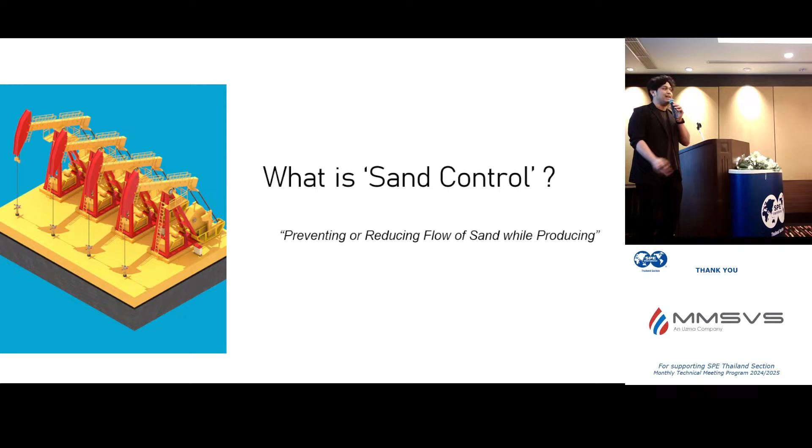So a little bit of introduction. What is sand control? Well, normally, if you produce something from downhole, whether gas or oil or even water, you have to expect something else from the reservoir, which is sand.

Sand comes in a lot of forms, but mainly we don't want them. So sand control is preventing or reducing the flow of sand while you're producing. That's just the definition of it.

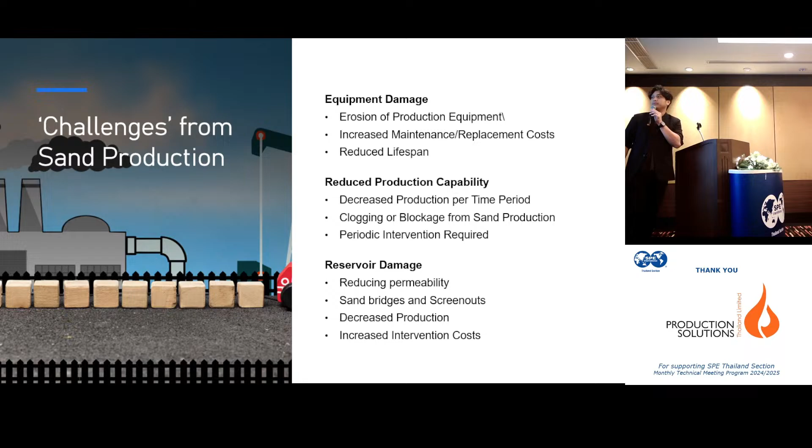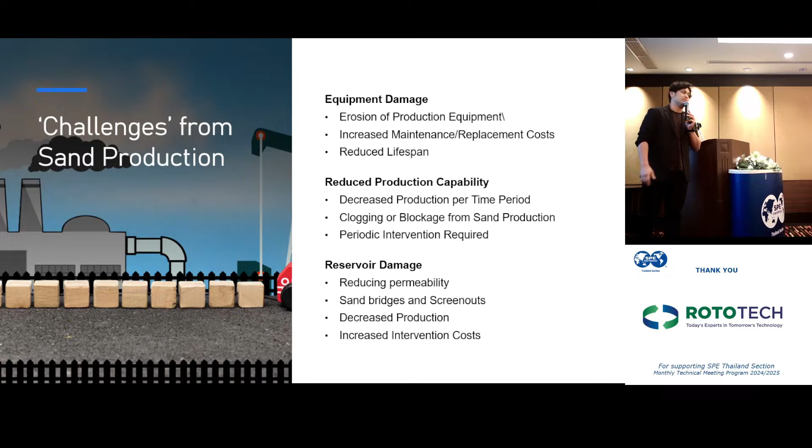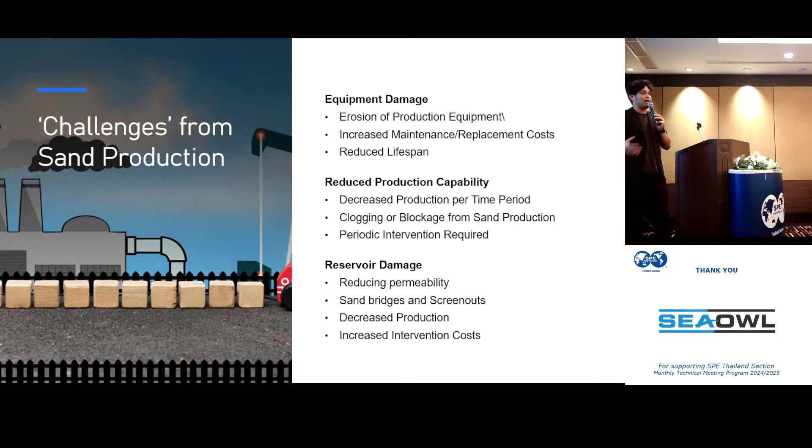So what happens when you get sand production while you're producing or trying to generate oil and gas for your revenue? Well, first of all, you get equipment damage. We know sand is a solid particle that does damage if you have enough velocity. Not only that, it also reduces the lifespan of your equipment after you get some damages.

The consequential cause and also some of the things that might happen along the way is you get reduced production, and that can be prevented from either an early stage or you try to control it at a later stage. Last but not least, reservoir damage, of course.

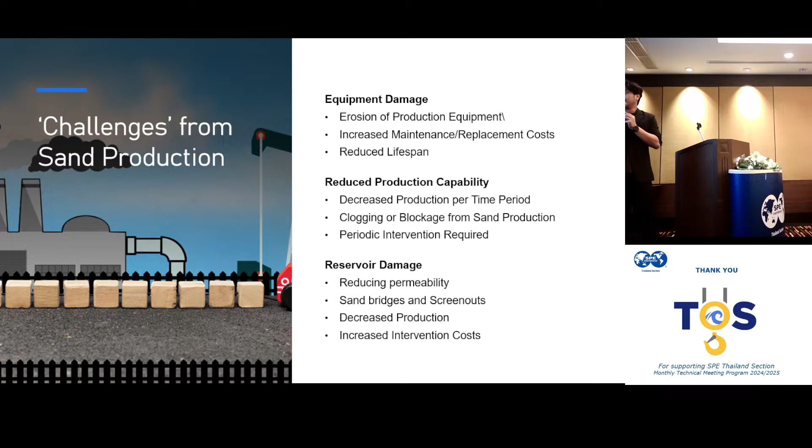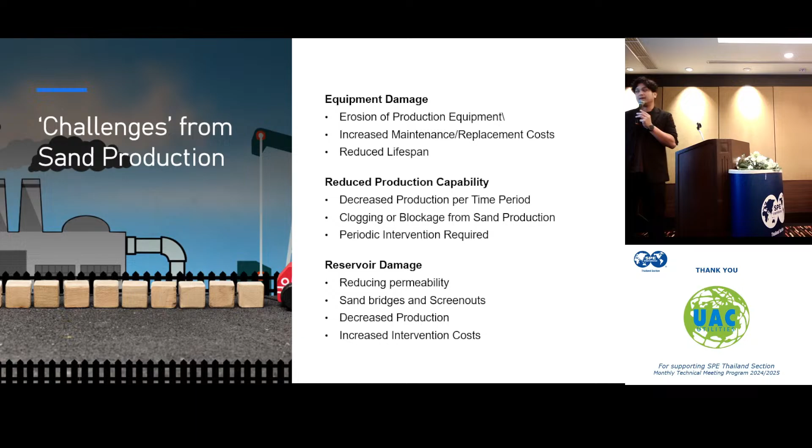The more you produce sand from your reservoir, something comes out, meaning you leave something behind. Mainly sand comes from the reservoir, so if you're losing sand, you're also losing some integrity of your own reservoir.

Okay, so there are many methods, and I'm not allowed to mention the names of the methods from different companies. So I did consolidate most of the methods into 4 major categories.

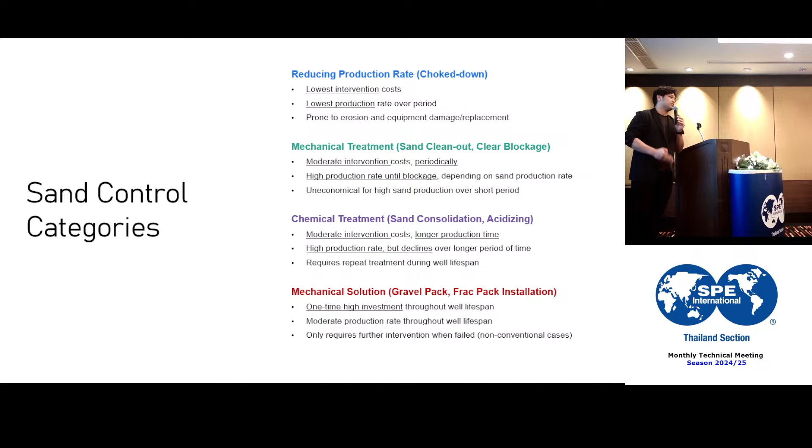First of all, is doing nothing, which is just reducing the production rate. If you do have sand, you don't want to produce it so fast that you can end up damaging equipment, either surface or downhole, doesn't matter between upstream or downstream.

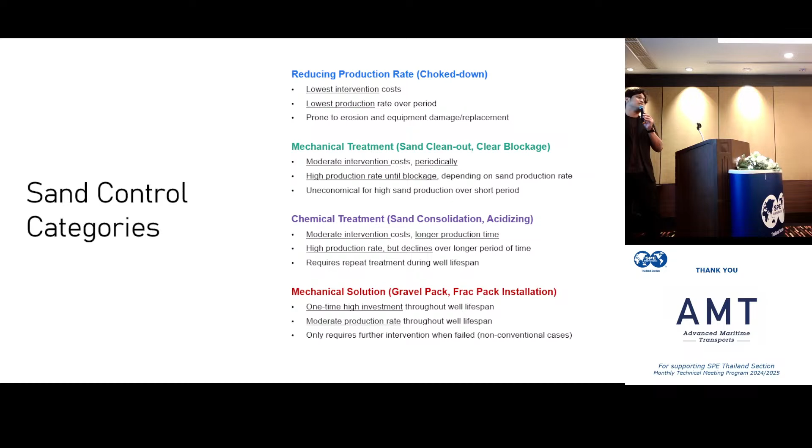Second method relies on some mechanical treatments. By mechanical treatments, we're talking about installation or partial installation of something - either you leave something downhole or you substitute downhole volume with something else.

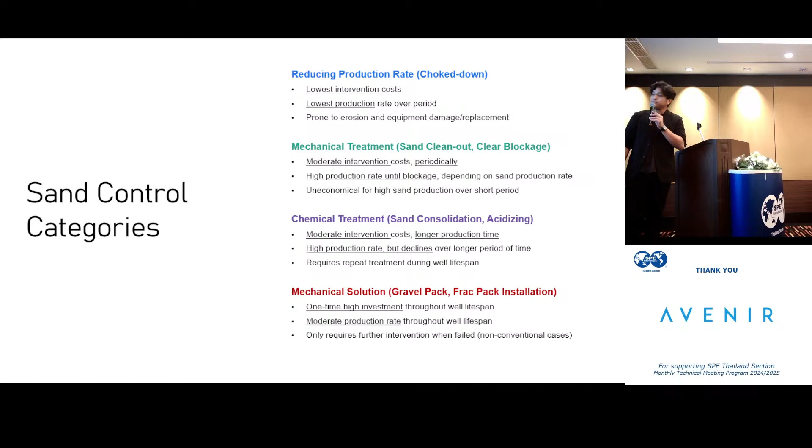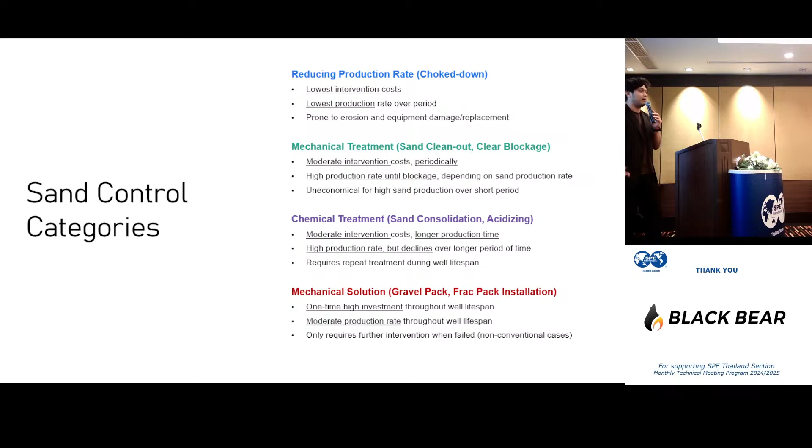Chemical treatment is based on using solutions where you get a chemical mixture, trying to remediate either the formation or the sand downhole before it comes up to surface.

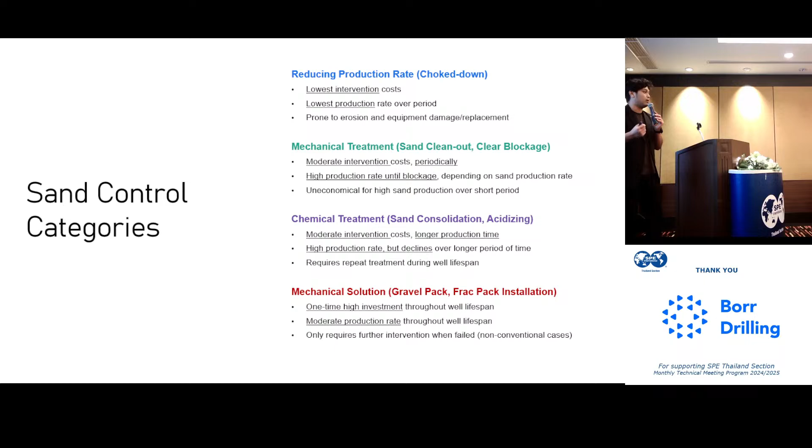And mechanical solution, which is a solution because it is designed to solve the problem permanently. However, that is only when it's ideal. There are so many cases where mechanical solutions or installation also fails, and that is also part of this presentation where we're going to talk about later on.

So some key points - I know this is quite a lot of text on one slide, but just to point out some of the main categories and the pros and cons. Reducing production does not involve any intervention costs until you do need one.

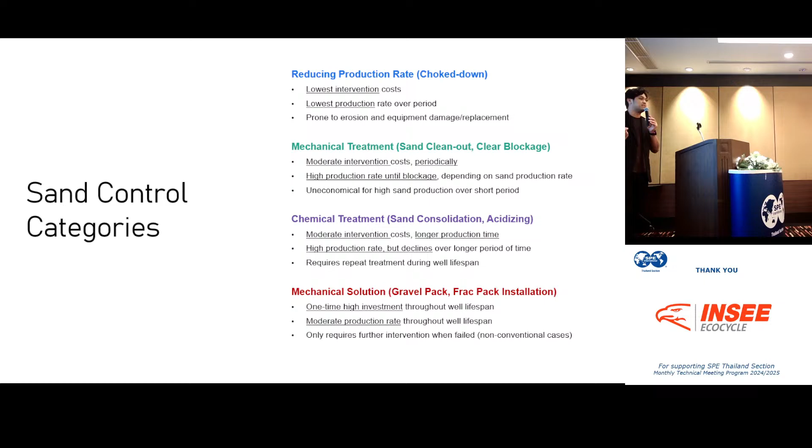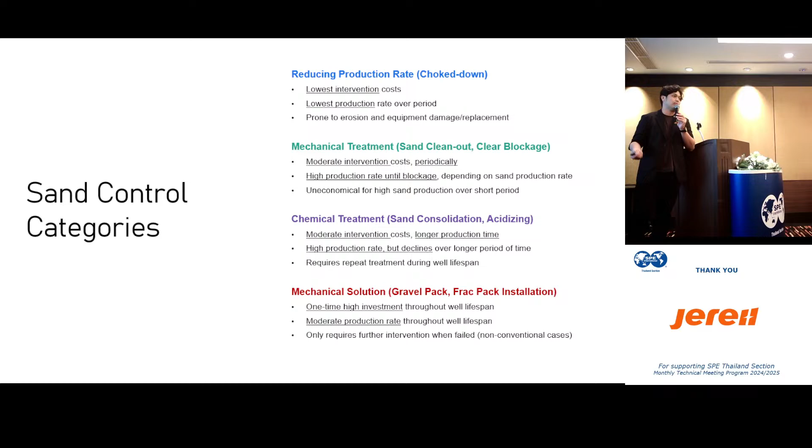So what does that mean? It means that you can produce sand up to a certain rate before it starts damaging your equipment and actually have to replace them. So you do get a low intervention cost because you don't have to do it that often or rapid. Second, you do get some lower production rates because you're trying to control the rate to not produce enough sand to damage something.

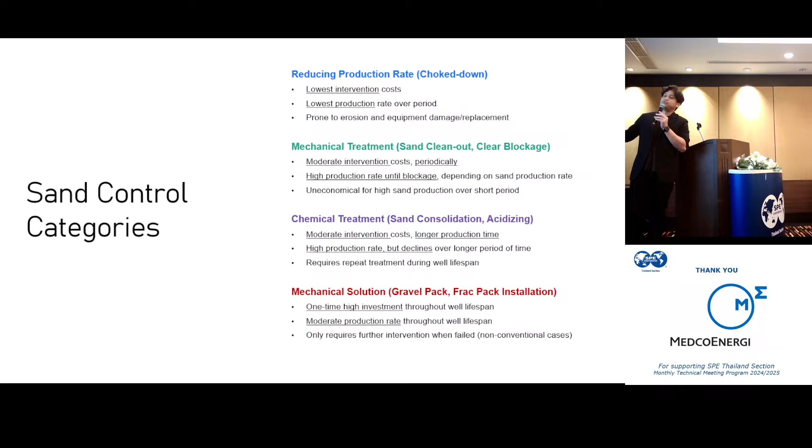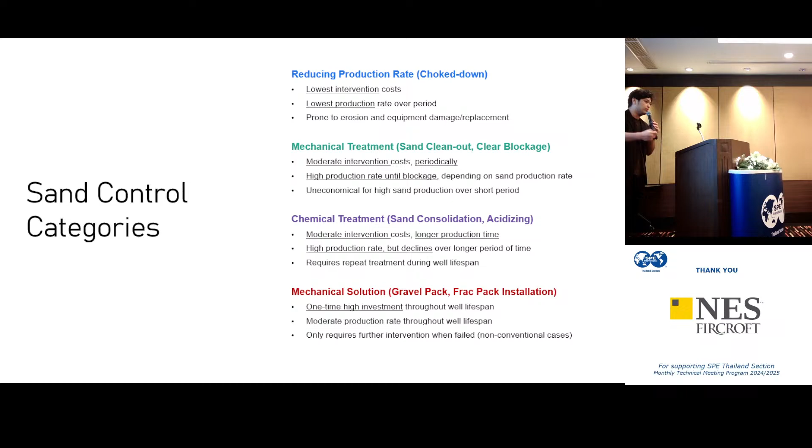Mechanical treatment is what we call just treatment. You go downhole, you have sand downhole, and you want to get the sand out. You either go down with coil or slick line, trying to bail it out to resume production. That's what mechanical treatment is limited to. You do get some intervention costs because every time you call out a service company, you have to pay them. So it's periodic, and you do get a high production rate in return. However, the risk is that you end up clogging, bridging, or actually damaging your reservoir at the end.

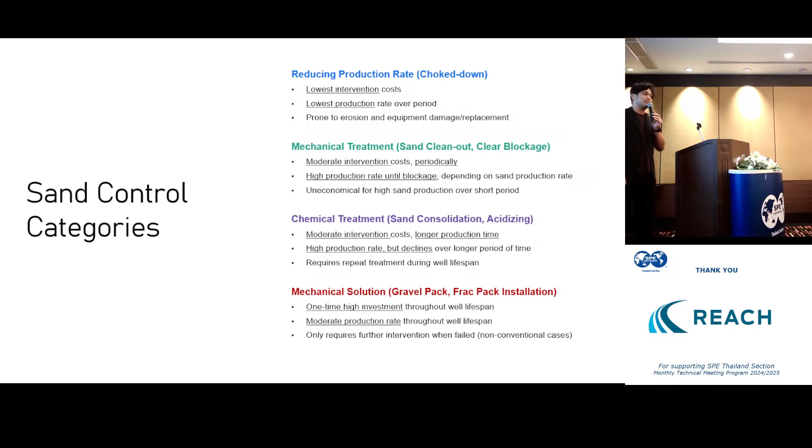Chemical treatment, on the other hand, is not done as often as mechanical treatment. If you do a chemical treatment, you expect it to last for a certain period of time, otherwise you don't consider doing it at all. So there are more costs compared to mechanical treatment, but you don't have to do them as often. That's the difference between the two treatments.

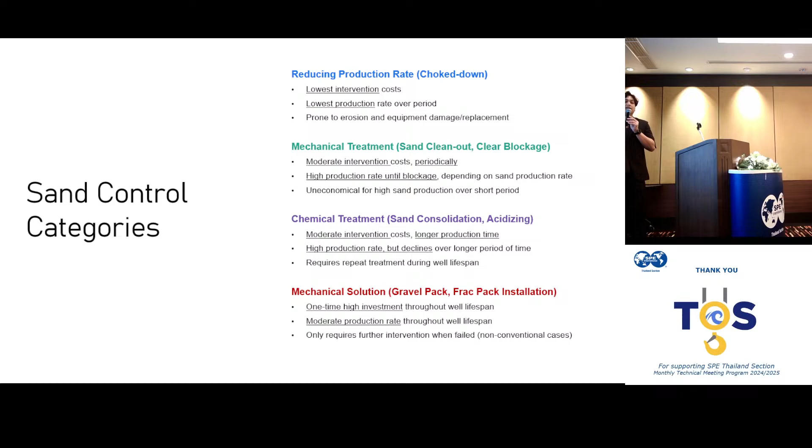And last, the mechanical solution is when you actually go down and install something to stop the sand from coming out of the formation at an early stage, an intermediate stage, or even the latter stage. So these are the four main categories that I can conclude for us in Southeast Asia and what we do.

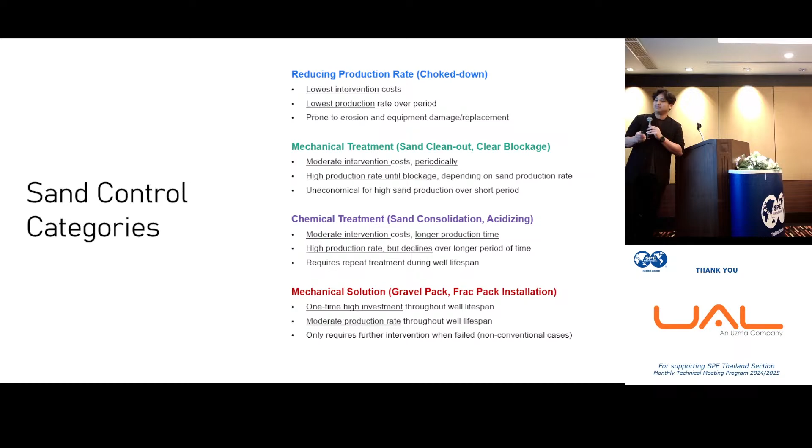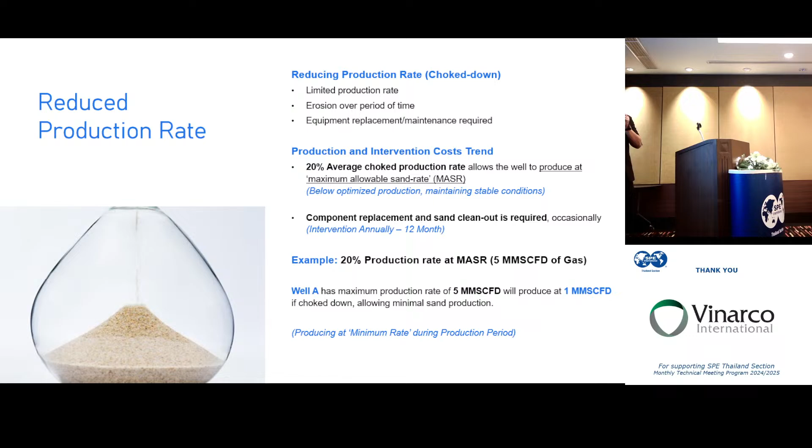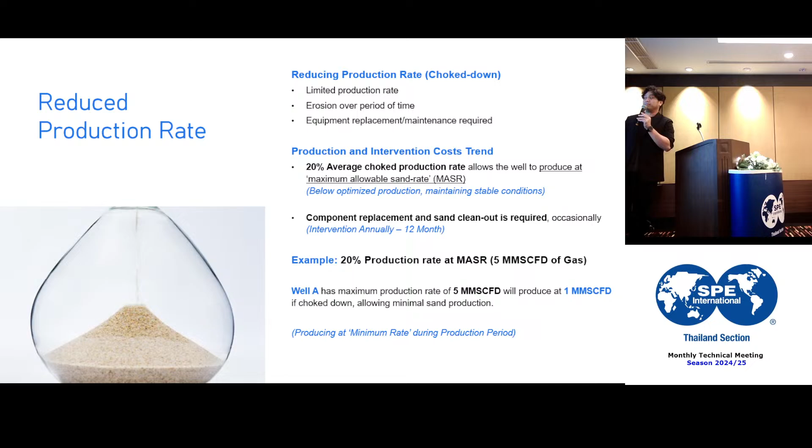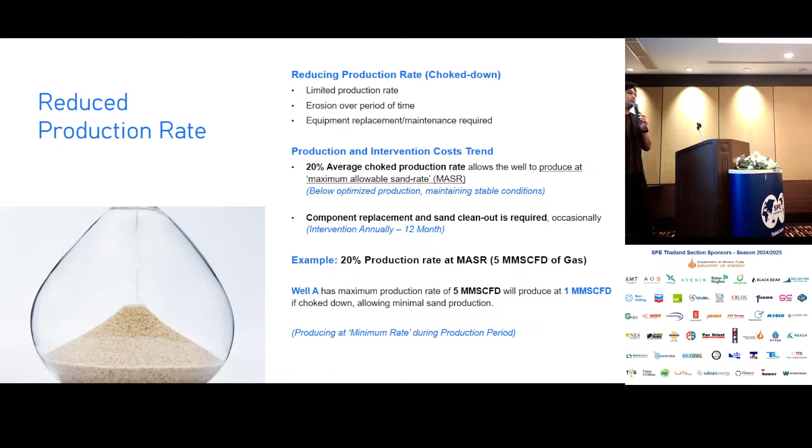So this is a bit more detail on what a reduced production rate is. On average, when we do sample collections from different places in Southeast Asia, we find that with a reduced production rate, you might have to choke down the maximum potential of the well to about 20%. That means when you're producing a gas rate of 5 million scf a day, or an oil rate of 500 barrels of oil per day, you can only expect to produce without the sand coming out at around 1 million scf or 100 barrels of oil per day. So 20% is the rate you can flow without producing the minimum sand, or no sand at all.

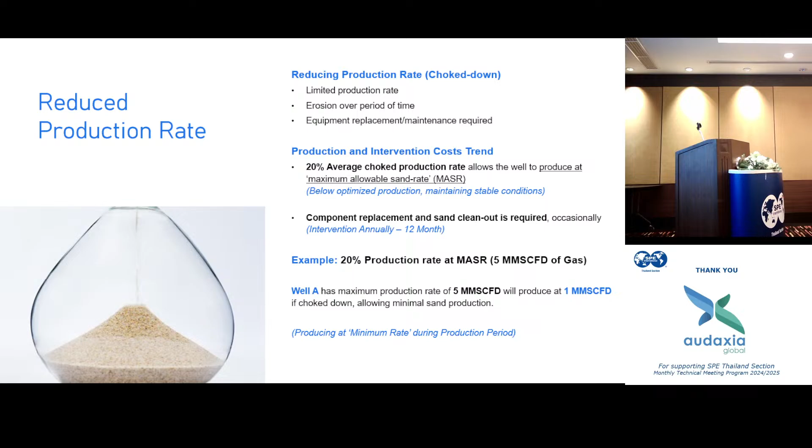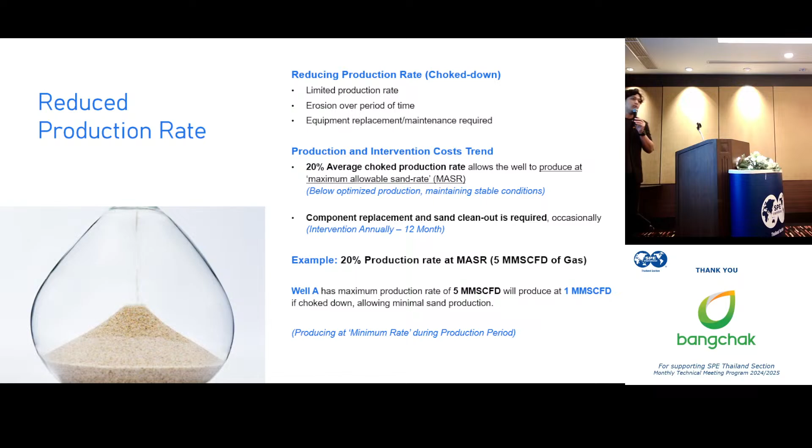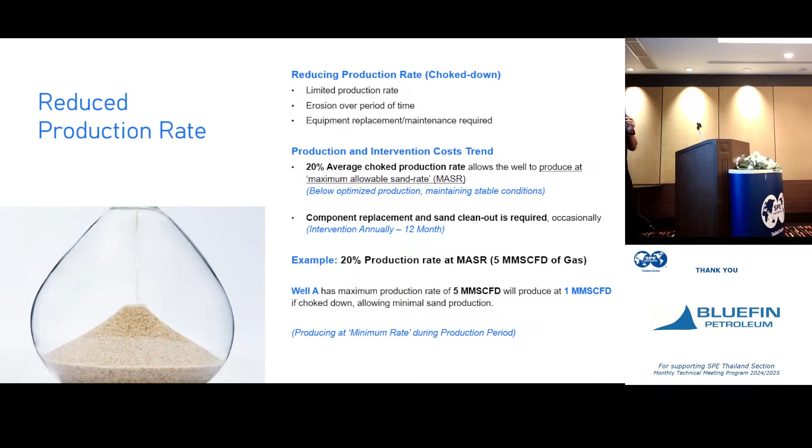That's what we're trying to aim for - not to produce the sand out, but still want the oil to come out. This way you don't get that much downtime, and you might eventually have to clean up the well from time to time. However, if you don't have to, you might still have to deal with equipment replacement or equipment damage later on. So this cost is somewhat not exact, and it doesn't happen every time. Case to case is also different.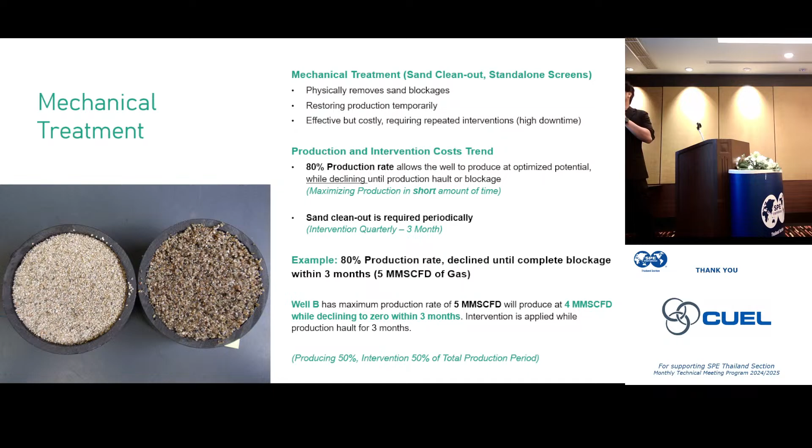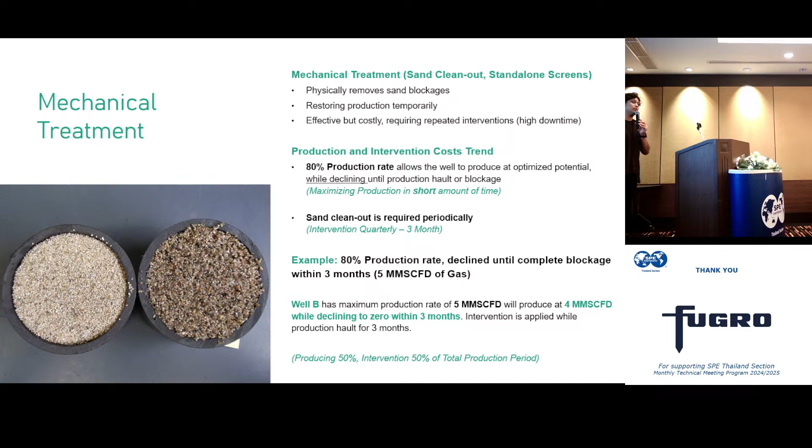Mechanical treatment, on the other hand, you can expect to produce as fast as you can, as much as you can, until you can't. This means that at a rate of 5 million scf, you might be able to produce at 4 million scf, which is around 80%. However, that well will be full of sand until you can't produce anymore, and then your production depletes. Once production depletes, your production is stopped, and you have to recover all the sand out until you can resume production again.

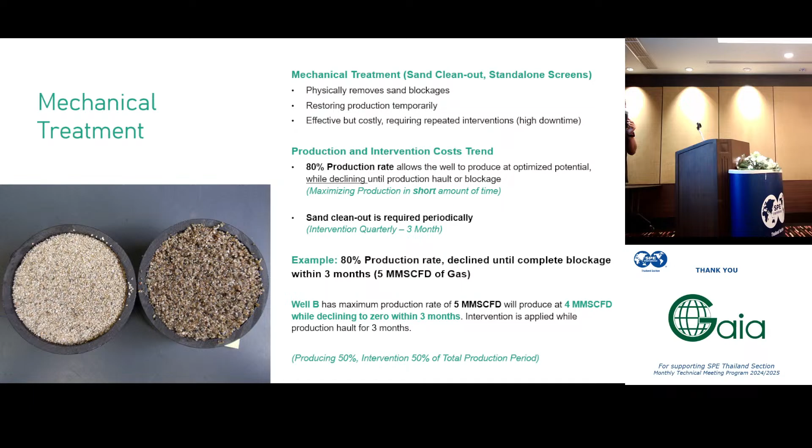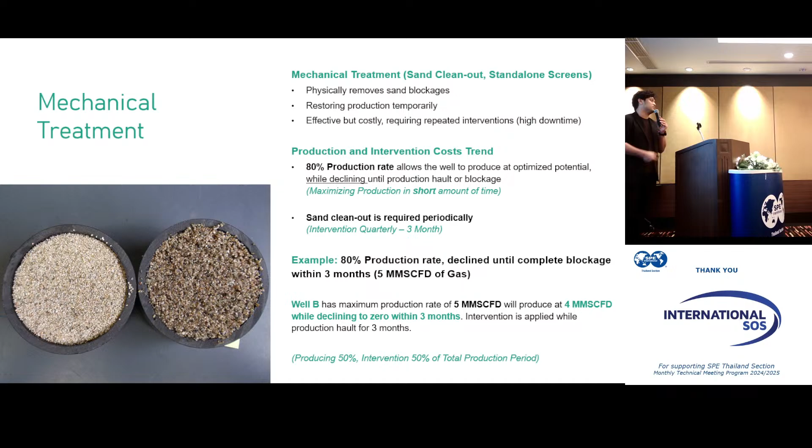So what we've found so far is that 50% of the time when you start producing, it's almost the same amount of downtime that you have to clean it out. So this becomes like a 50-50 split, where you can produce and you can't produce, and you do intervention instead.

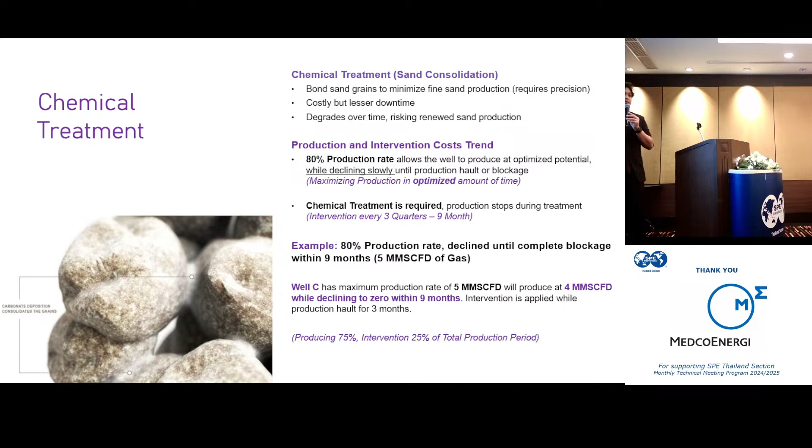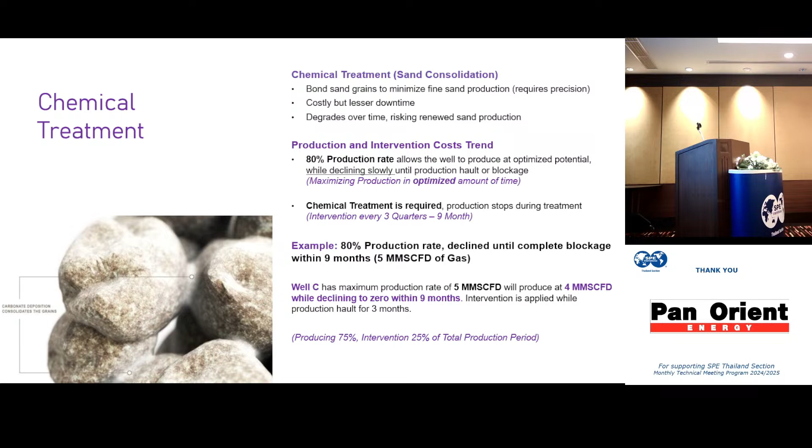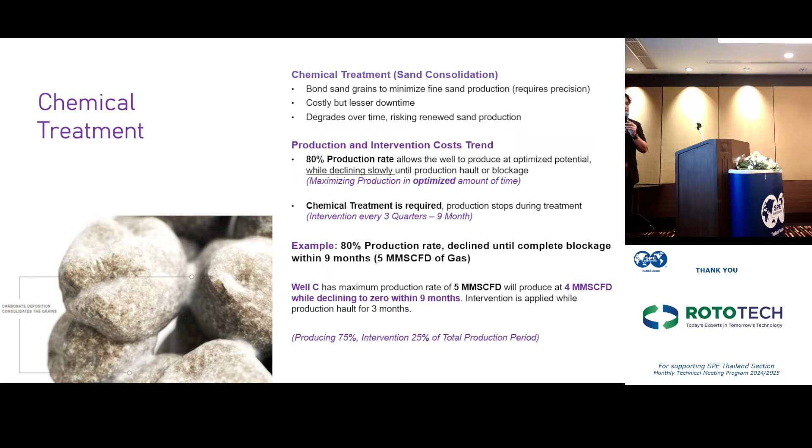Chemical treatment is similar to mechanical treatment, but instead of taking something out, you're actually trying to secure a pattern of sand downhole that allows the flow to not produce sand, or at a minimum rate of sand. Same as mechanical treatment, you can expect a slight reduction in production - you can still produce around 80%, and you can produce it for longer than with mechanical treatment because you're actually stopping something downhole. This allows the well to produce naturally while holding back the sand that's supposed to be produced. So 75% of the time while producing, it does produce without the sand, and the other 25% is downtime where you have to stop and intervene.

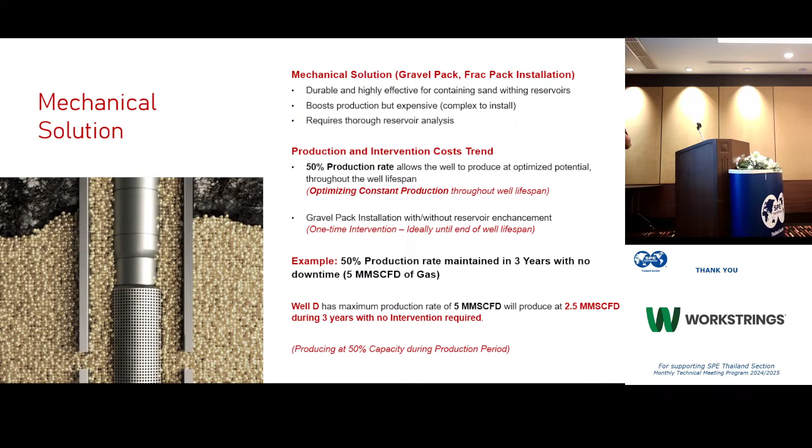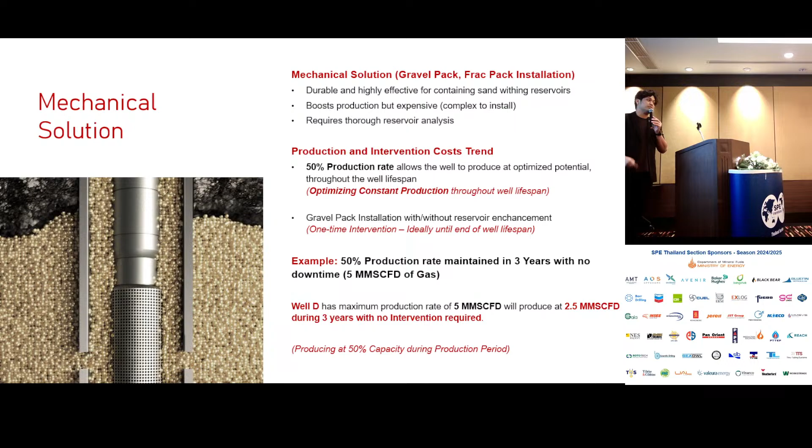That is the cost you will bear, either at the earliest stage after drilling and perforation, or later when you have too much sand and are cleaning it out repeatedly. Eventually people start looking for a solution so they don't have to keep doing that, and that's when mechanical solutions come in. Producing all the time at 50% of the rate is what mechanical solution offers as a conservative estimate.

Now, when we compare all four methods using the same criteria, how do they perform? First, we compare based on efficiency. It has to be the same reservoir, with close permeability or mobility, the ability for fluid to flow.

These are ideal conditions, because in actual wells or operations we can expect many non-ideal factors. That's what we call well conditions. Every logging engineer knows we always blame well condition.

We also use a comparison period of 3 years, which is the timeframe we collected data for and a fair basis for comparison. We can't compare a well that only flows for a year to one that flows for 5 years, so 3 years is a median number. It's not the average for wells in Thailand, Myanmar, or Brunei, just a useful reference point.

The production rate is limited to a gas rate because most well data in Southeast Asia, around 70%, is gas with the sand control problem. A gas rate of 5 million scf per day equals 450 million scf per quarter, which is 90 days times 5. So we measure output by quarter.

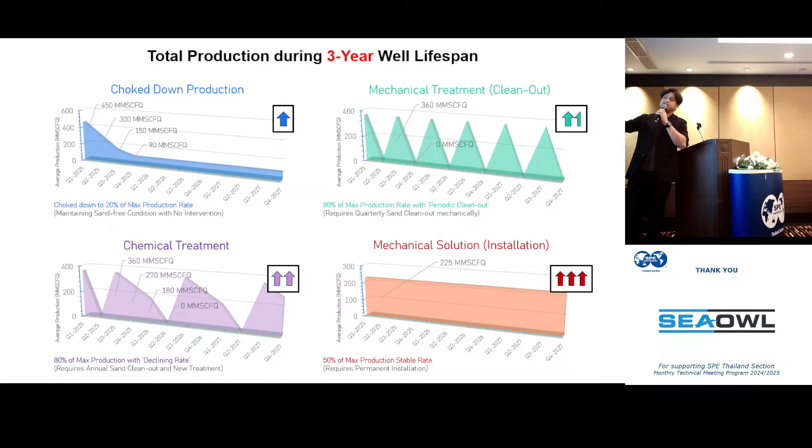Starting with the production comparison: on the blue line, top left corner, choke down production. You can flow at a maximum rate until you can't, so you lower the rate by testing to find the sand rate you can allow or want to avoid. At the end of the day, it's around 20% of the maximum rate, so 450 million scf per quarter drops to 90 million scf per quarter, and you flow that amount for 3 years without any stoppage.

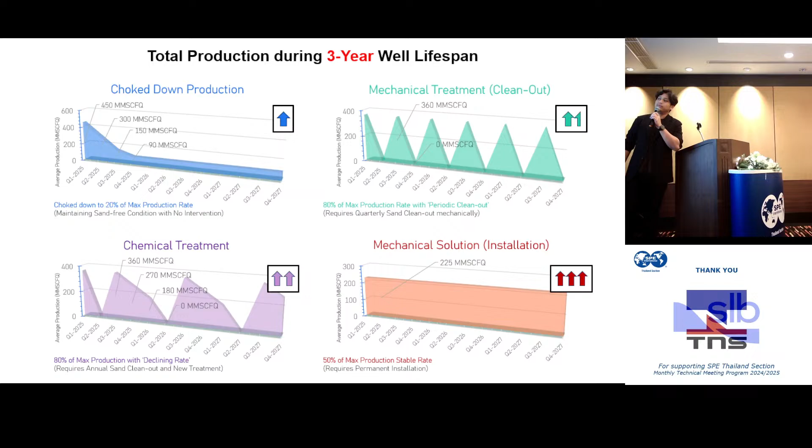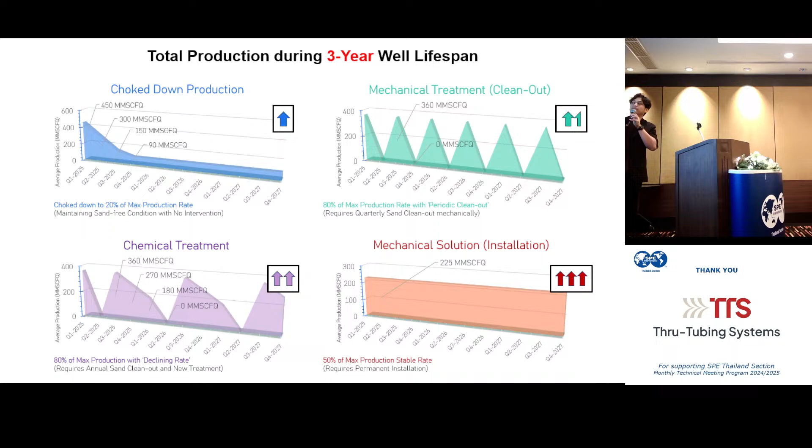Second, mechanical treatment, the green graph. You can expect to flow at around 80% rate, but every quarter or every two quarters, you stop to do an intervention, getting the sand out to let the formation resume production. This happens periodically, with 50% of the time producing and 50% downtime.

Chemical treatment, on the other hand, also flows at around 80% of the rate, which is 360 million scf per quarter, until it declines down to zero. That may take 3 to 4 quarters or a year. Each time you stop for around 1 or 2 months to do the intervention before doing it again annually.

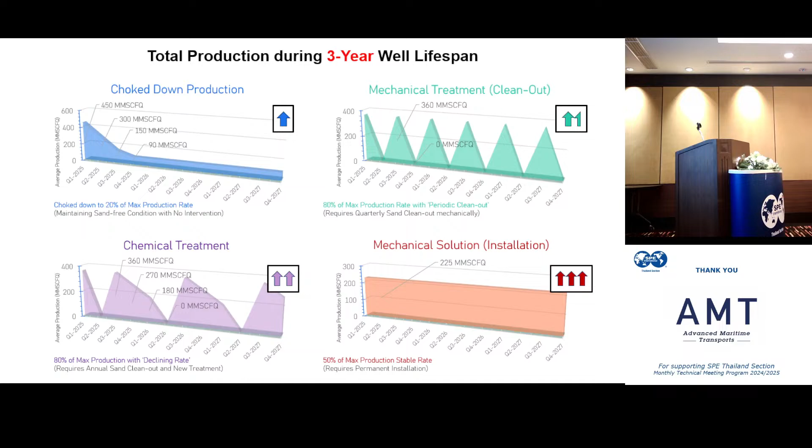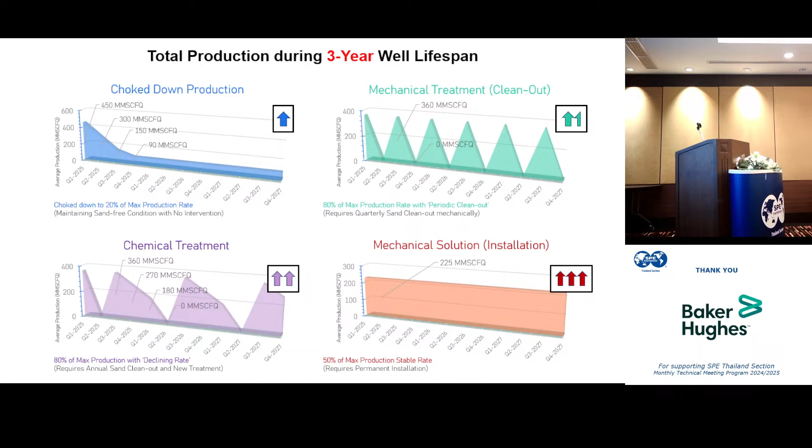Last, mechanical solution is a one-time investment. You start from the beginning expecting the well to produce at 50% all the way without any stoppage or further intervention, everything ideal. If you compare, the choke down case gives the least production, while mechanical and chemical treatment involve flowing and stopping repeatedly. Totaled over 3 years, these give a moderate production pool.

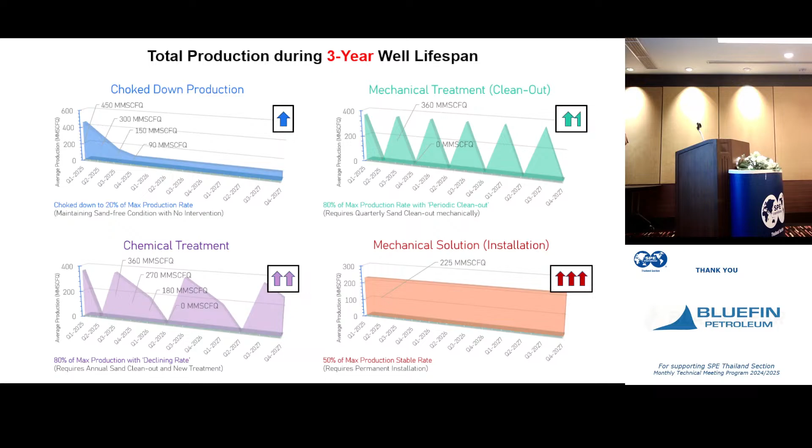Mechanical solution, if everything was ideal and no problem occurred along the way, this one-time investment will get you the most amount of production rate in a 3-year period.

Now we compare the intervention costs. This is what most client companies are most interested in, spending money to do something. Choked down production has a cost, but it's not that much. It all depends on what type of equipment you have, how complex the well is, and what parts you're going to replace if it actually damages something. But you can expect some damage over time - it might not be 1 year, 2 years, but at least once in a lifetime. So in comparison to the others, choked down production will give you the least amount of intervention, and you might not have to do it at all.

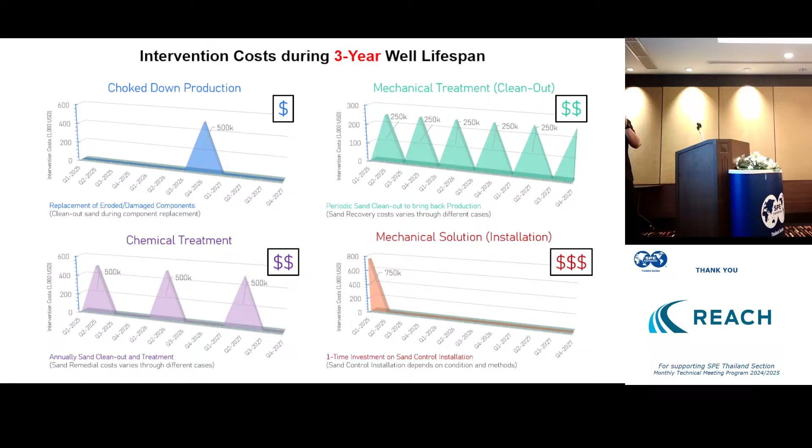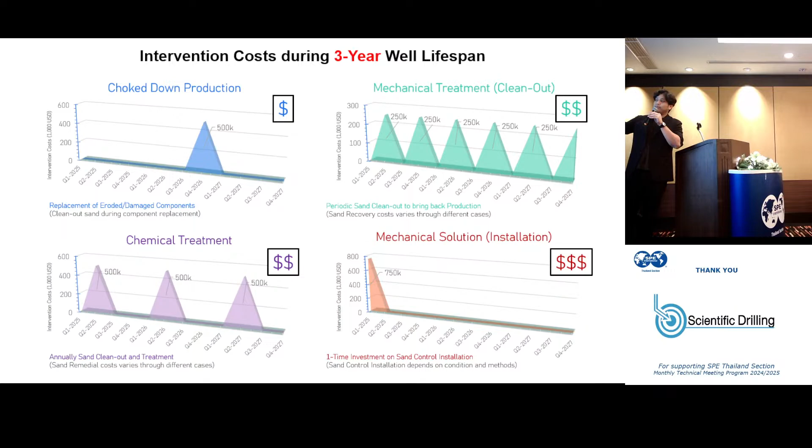What is that suited for? It's suited for production rates that are not that many. A small reserve is comfortable doing a choked down production because there's not much economic investment needed. Mechanical treatment, from time to time, is what we do if you have a high reserve to invest, or if it suits your economic plan. So for all 4 methods, the intervention cost you see as a dollar sign is whatever you have to pay per single amount of time, within the 3 years that you need to invest.

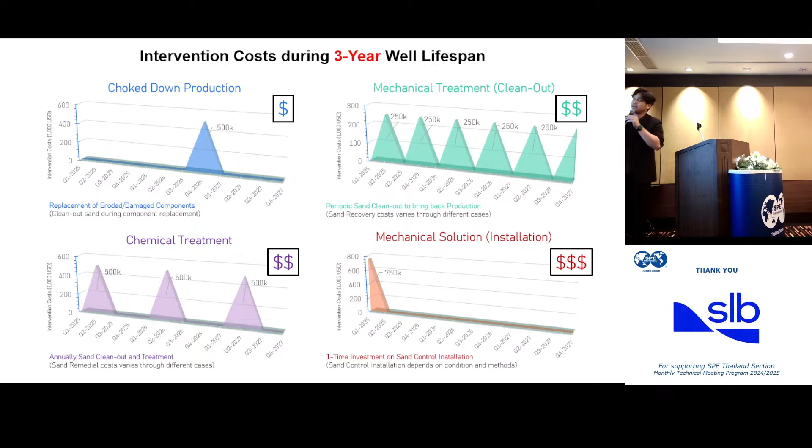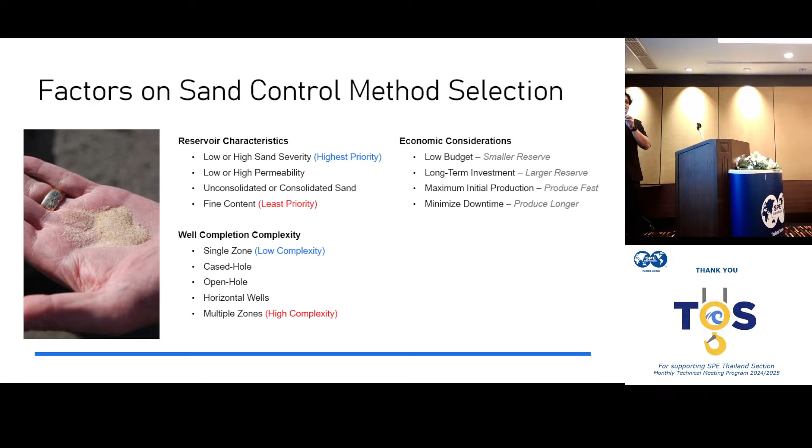Now, from all of that, there's quite a lot of data to seep in. However, there are case histories that are done in Southeast Asia, and there are factors on how to decide and what to use on these methods that I would just mention here.

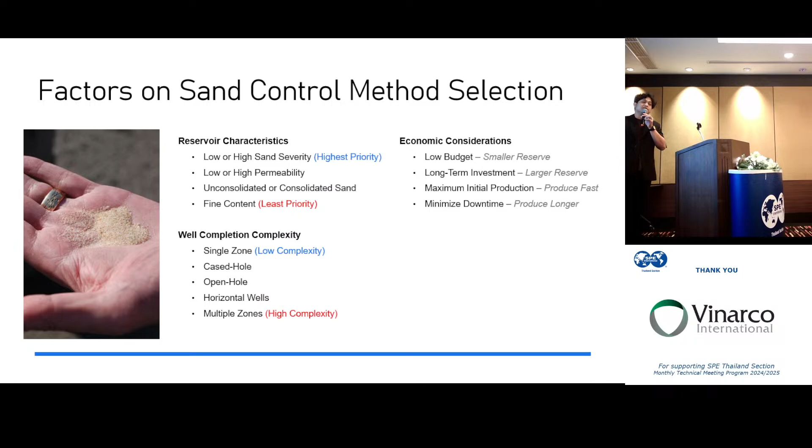First of all is the reservoir characteristics. Low or high sand severity will kind of depict and help you decide what type of method you're trying to aim for, which will give you the best solution. High or low permeability also has a lot of role in there. Unconsolidated or consolidated type of sand - are the sand sizes the same as each other, or are they different? Fine content - the smaller sand seems to be the ones that we have to deal with and create the most problem because they're light to flow out, and it also does a lot of damage in terms of erosion with high velocity.

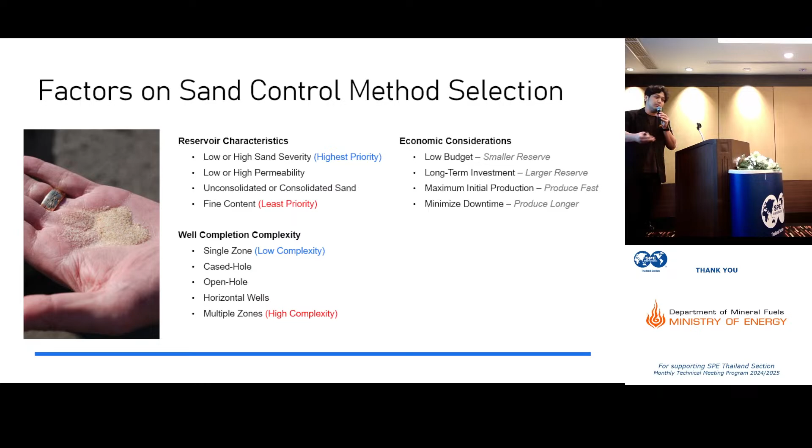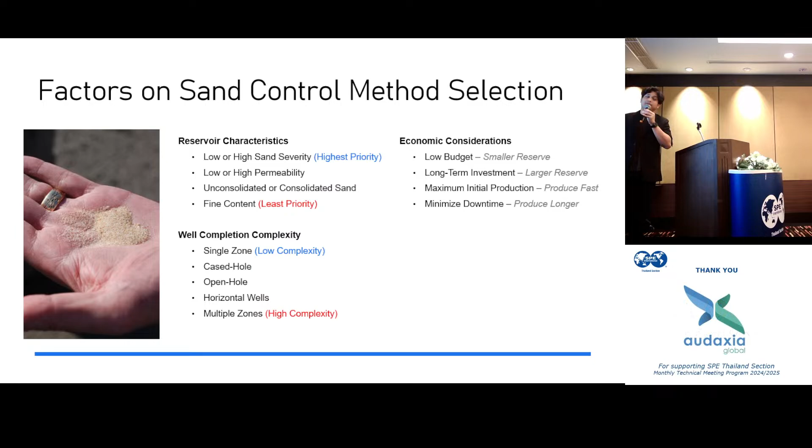Well completion has a lot of role. I would say it's a 50% chance that if you have a well, there's only 2 or 3 methods that you can apply to it. And some wells are so complex that you can only have one method, and that's the only choice you have. Economic considerations, of course, are the most important, because if you don't have money to do it, then you can't do it. But if you have money to do it, and you decide to do it at a later stage, you might already run out of budget to do it.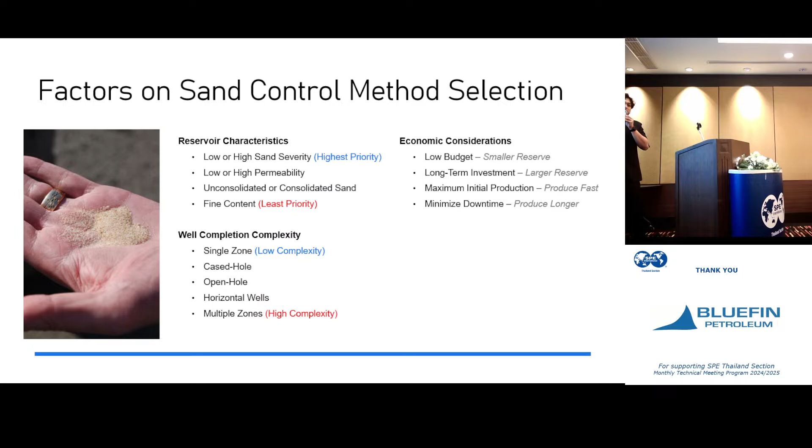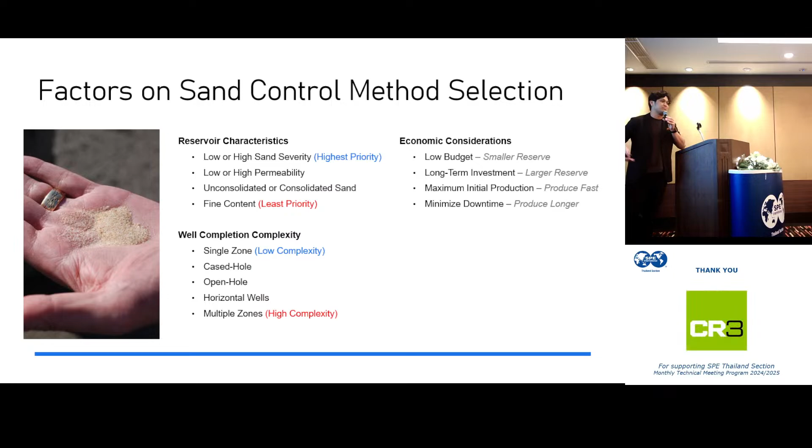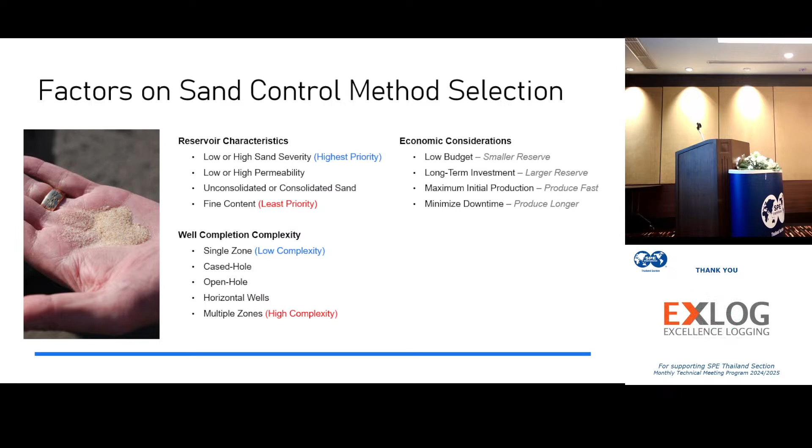So economic considerations are really important. If you have a low budget, it means you might have a small reserve. If you have a long-term investment, you might have a larger reserve to invest on. And of course, if you're trying to race against the oil or gas price and got a good price and want to produce more, you might want to produce as fast as you can and then deal with the sand later. Minimizing downtime is suited for a lot of companies that want to do the least amount of intervention or workover as possible.

So this is the most important slide out of here. It is a lot of data, but I did find a way to actually divide it in a way that we can talk about it. This is the actual well data from Southeast Asia, and that includes around 6 countries that we collected data from: Thailand, Brunei, Vietnam, Myanmar, Malaysia, and Indonesia.

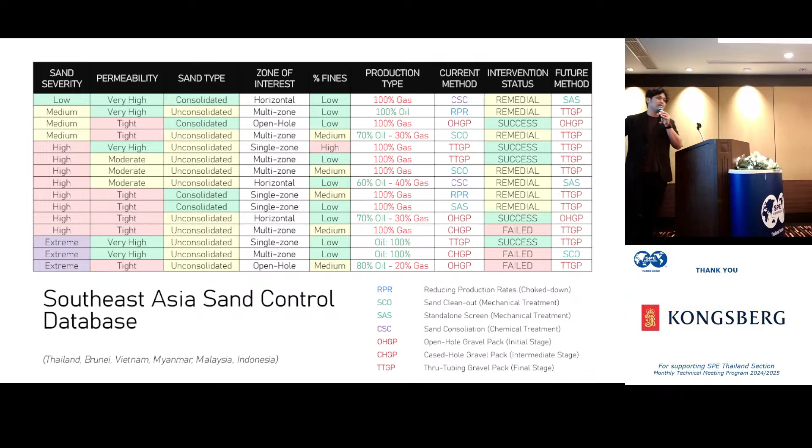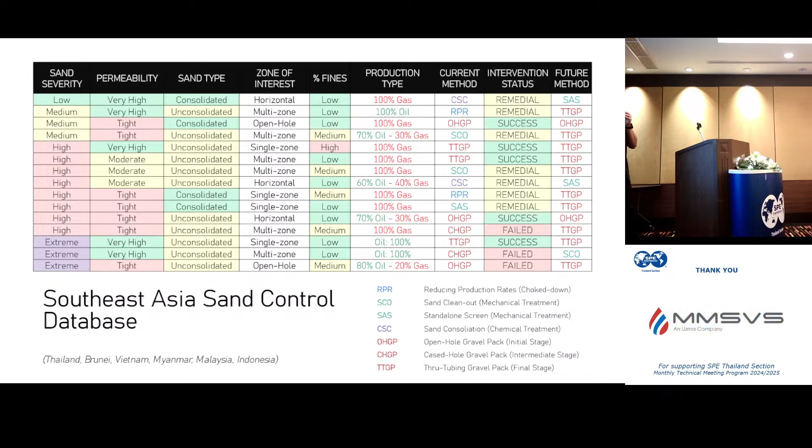The reason we have this data is because we know a company that does all of this evaluation all in one region, and there's not many of that. Most big companies have data, but because their geo market is so dispersed, they don't get to share this data amongst each other or have the lessons learned enough to actually come up with a graph like this one.

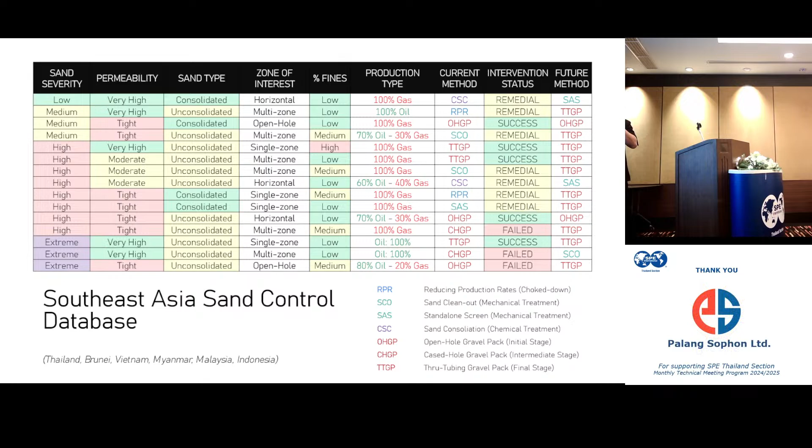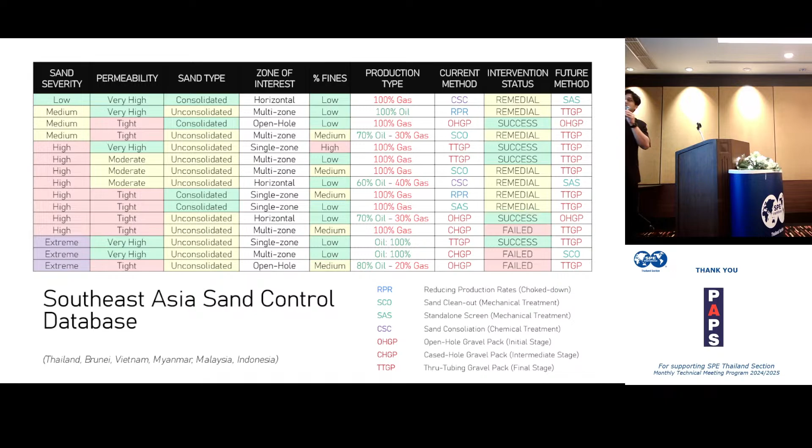So we're not specifying which country is what, but we do divide this into categories of what factors we're looking at. On the left side, there's sand severity, permeability, sand type, the zone of interest which is the completion type, and the amount of fines. We don't focus on the production type - that will kind of tell you which wells you're suited for, what type of production you have.

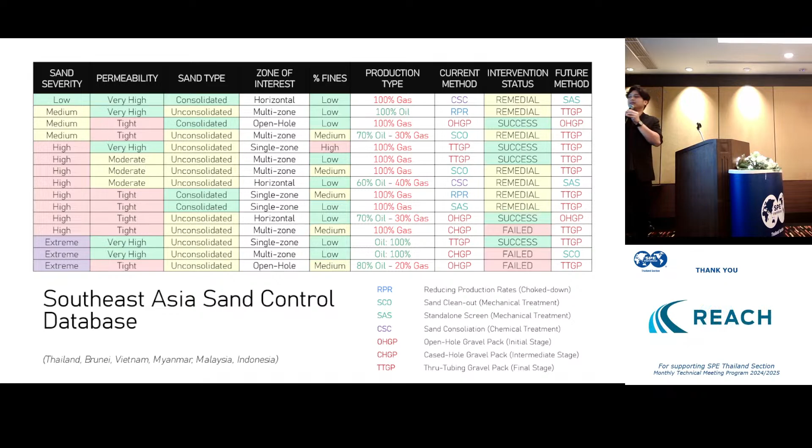Starting with the top one, low and medium sand severity. In our graph, we only have data samples for consolidated sand and unconsolidated sand with high and tight permeability. Now, from what we observe here, this is not just one well, but a set of wells that share the same reservoir characteristics.

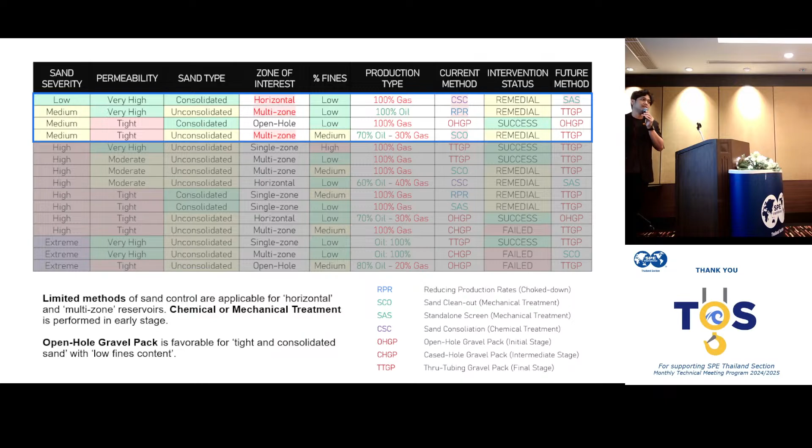So we learned that in tight consolidated formations, open hole gravel pack seems to be the one that works best at the early stage. This is done because they know the historical data from the core sample to deal with it at the early stage. So this is one of the least investment and does work, whether it's an oil or gas well doesn't matter, as long as it's consolidated sand type with high permeability, or tight permeability, sorry.

Other than that, people with wells that have low sand severity don't have to deal with sand control that often. So the most economic methods include some remedial treatment, which we talked about. It's either going to be mechanical or chemical. CSC is chemical sand consolidation. At low sand severity with consolidated sand, chemical sand consolidation is the method that a lot of companies apply, because it does last quite long in a certain condition, I would say.

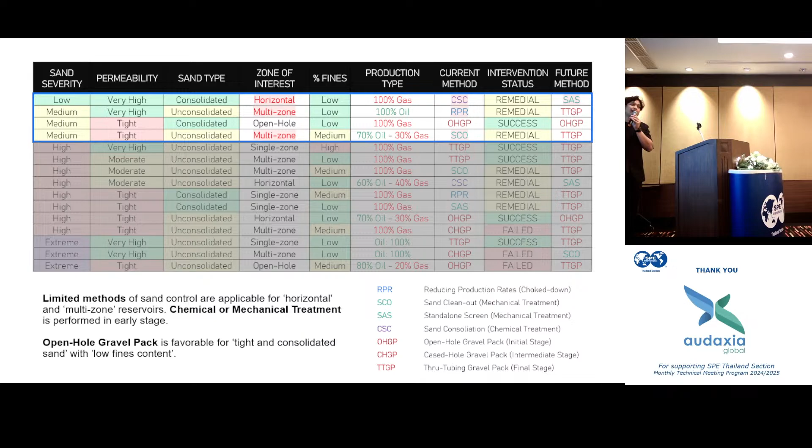And other than that, if sand consolidation doesn't work, then they do a reduced production rate or sand clean out, which is SCO, in most of the multi-zone wells.

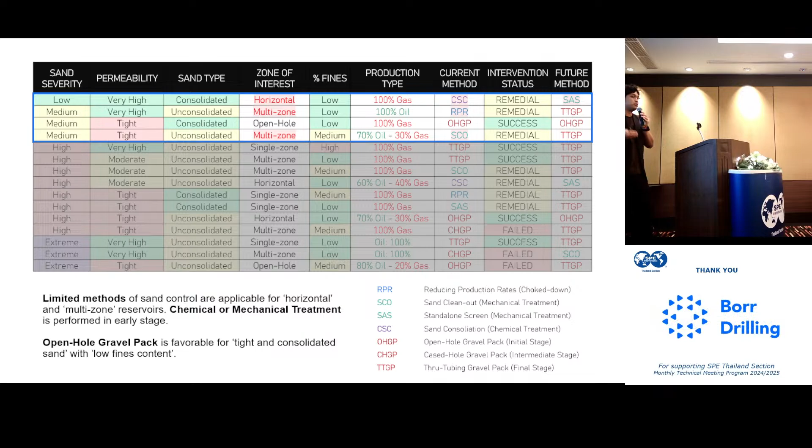Now, when we talk about a multi-zone well, or where the zone of interest is multi-zone, it means you have more than one perforation inside a well. And that is what we have a lot in Southeast Asia - we produce commingled, trying to get as much production out of the well in a certain amount of time.

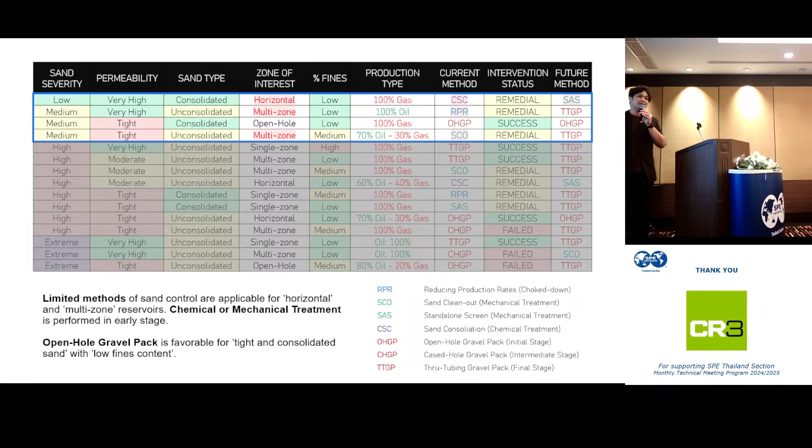Now, if everything goes fine and it's ideal, that's a good choice - of course you get more production in a certain amount of time. But in non-ideal cases where you actually have sand, that is one of the hardest ones to deal with because of the complexity itself.

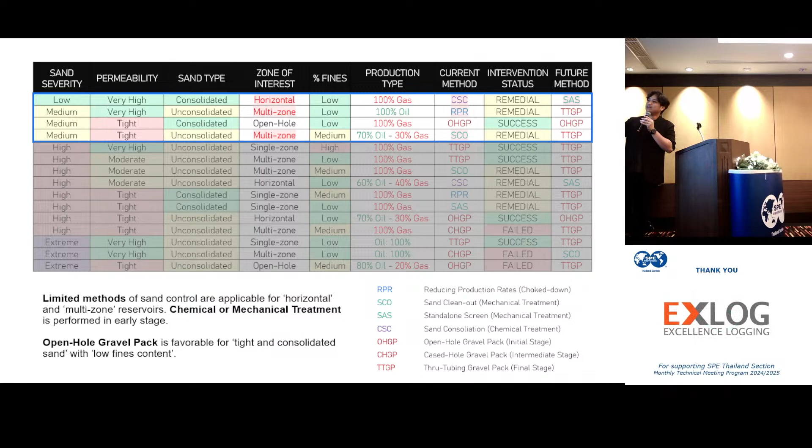Now, looking at the data on the lower side, which is sand severity quite high and also extreme, there are certain probabilities. We have a lot of data samples that flag as high sand severity in different completions. So we found out the method that fails the most is actually cased hole gravel pack, and we learned why. Cased hole gravel pack is usually done in a multi-zone well, where they try to pack everything in one go, meaning we have three perforation zones.

They try to do a gravel pack, substituting the sand in front of it into multiple locations or multiple zones at the same time. Now, not the same propping size or sand size would be able to stop us at one type of sand or multiple types of sand at the same time. Let alone if you're doing multiple zones, you have to expect multiple types of sand, so you'll have to use multiple types of proppant to stop it as well. That's not really practical in cased hole gravel pack, which is why a lot of these show as failed, especially in extreme cases.

However, if you do a cased hole gravel pack and it fails, can you do a further method? Well, yes, there are also future methods that we discuss with a lot of these users - what do they plan to do next? Some people have already flowed the well for a couple of years and it's reaching the end of well life. They will consider doing some sand clean out rather than another one-time intervention. So that's where the SCO comes in for extreme sand cases.

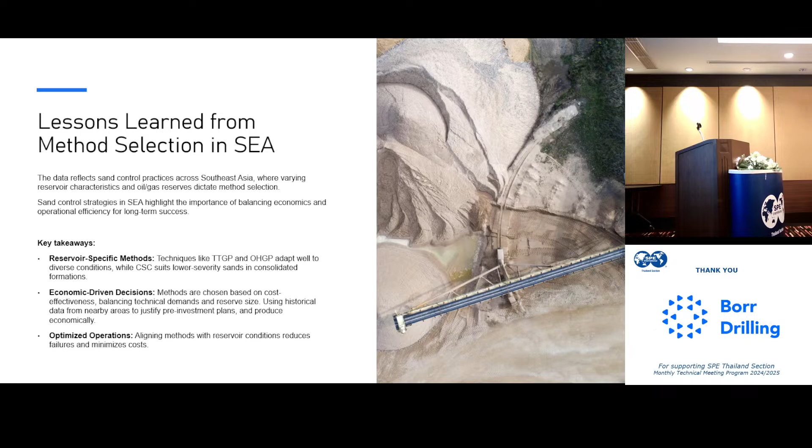Optimize operations - we do have case histories where we found wells that were done the same way until they started making improvements. That's why we talk about the evolution of sand control: if you have case histories, which is what we're acquiring here over the years, you'll be able to see the trend and also what to expect from reservoirs nearby. I think that by far is what can be justified as a method for picking what sand control you're going to use, just because most of this is not the same.

Southeast Asia is really dispersed, as you may know - locations are not the same. In Thailand, we have high temp wells; somewhere else, we have high CO2, high H2S wells. They're not going to be treated the same way. So that's what we learned from Southeast Asia - we have a baseline, but the baseline might not work everywhere.